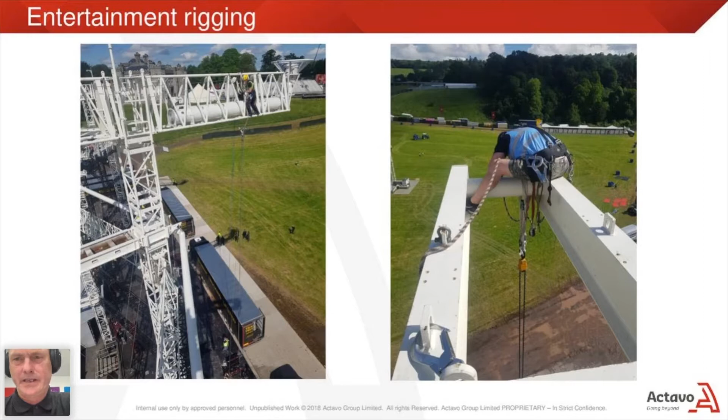Okay, so let's go through some of these slides. As I say, the slides are really just eye candy and don't necessarily correspond to what I'm talking about, so because it's quite technical, there's some slides of guys at work.

So I was talking about the difference between film work, film rigging, and event rigging. In film rigging, a lot of the work is in compression, so you're building scaffolding, tube and fitting scaffolding, building platforms for lights and cameras, support for sets and specialized rigs. You're also doing quite a lot of work in tension, so you're lifting and supporting loads. There's hanging structures and wire work for counterweight rigs, whereas in entertainment rigging, it's all in tension. So there is a bit of crossover, because riggers quite often work on projects building ground support structures, for example outdoor stages and ground support trusses, etc, generally with a purpose to hanging stuff out of them or supporting something.

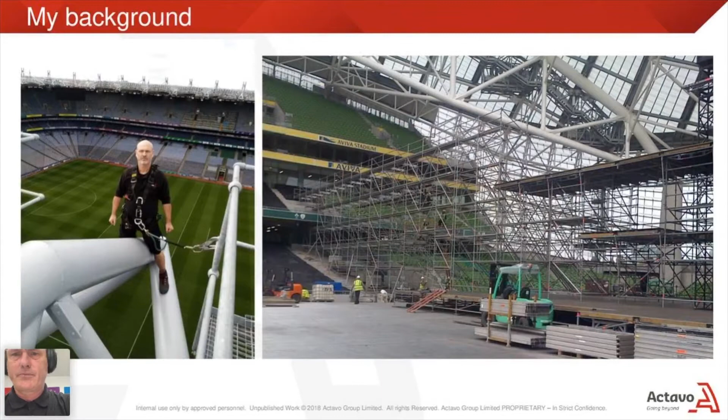So I would like to use an analogy. That's a picture of me on the left. It's a bit of a simple analogy really, but anyway, rigging is like driving a car.

You need to understand the task and where you're going. You need to choose the vehicle that's appropriate for the task. You have to have the safety measures in place to protect the driver - seat belts, airbags, etc. You need to have the right requirements to make the vehicle go - fuel, water, etc. You need to provide any special equipment that you need, like child seats or accessibility vehicles. You need to ensure that the vehicle is roadworthy and you're competent to drive it. You need to arrange permissions, insurance, permission from the owner, tax, obey the rules of the road, avoid shortcuts and congestion, and you need to respect other road users, provide proof of compliance at checkpoints, and finish the journey - park up, hand over your charge, and go home safely.

So safety is first and foremost in everything we do. Under EU directives, we have our primary legislation, the Health and Safety at Work Act, which details employers', employees', manufacturers', suppliers' and installers' responsibilities. There's also a raft of regulations that affect the work that we do. We've got our manual handling regs, working at height regs, management of health and safety at work regs. We also have lifting operations and the provision and use of work equipment regs, plus there's the CDM regs, which is the Construction Design Management regulations. And there are also industry-specific regulations that we need to follow as well.

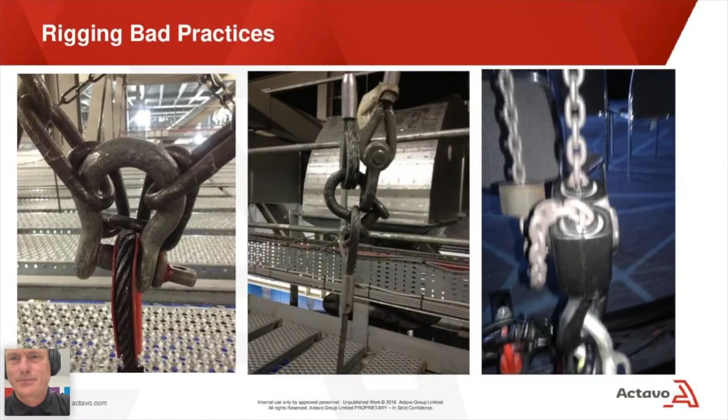I forgot to press on the slides, folks. So here we go, bad practices. Sorry about this. Now, here we go.

NRC is the National Rigging Certificate. It's really the only game in town for entertainment rigging. It's not a training scheme, it's an assessment scheme. They assess the skills that you should have and the knowledge that you need to have to work as a rigger in the entertainment industry. It's very useful. It gives you the confidence that you know what you're doing, have the right knowledge. It also gives employers and insurance etc. the confidence that you also know what you're doing.

So we're going to look at the riggers' roles and responsibilities. A rigging team consists of a head rigger, grounders, and top riggers. So ground riggers and top riggers. Generally they're broken down into teams of 3, so you'll have a ground rigger and two top riggers or up riggers.

Following the RAMs and toolbox talks, and signing, reading, and understanding your risk assessment and method statement, the first task is to measure out. This is called walk and chalk, and it's where we, using the rigging plot, mark out the positions on the floor of the plot with chalk using symbols and identification marks. The head rigger will then check these positions to make sure that they're achievable in the roof and negotiate with the production if any of them need to move.

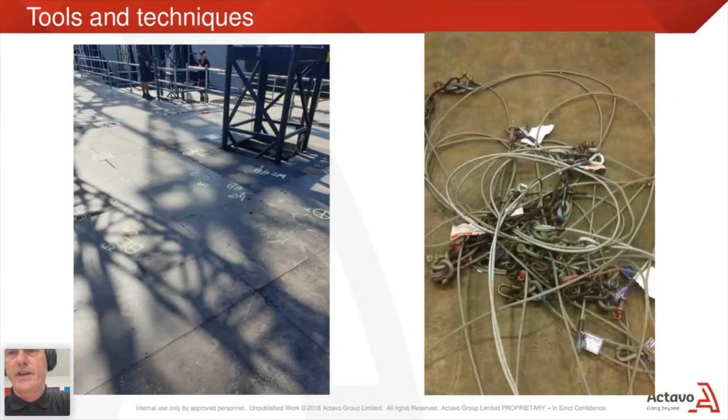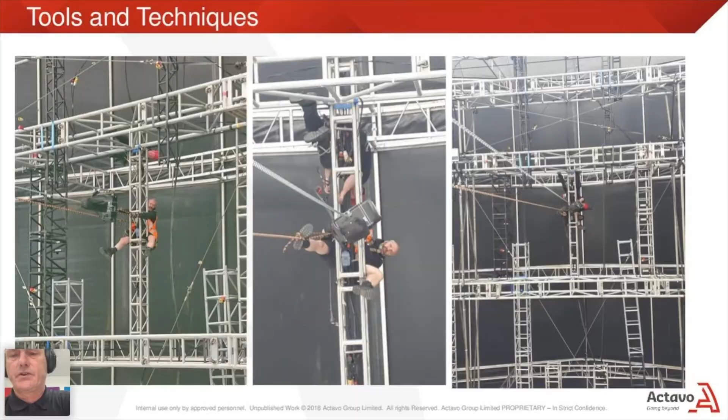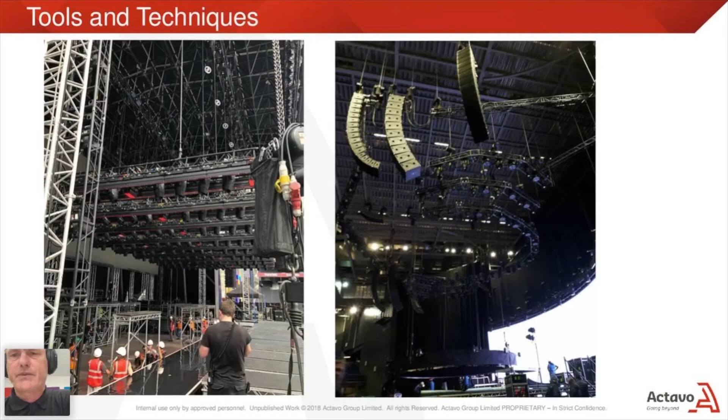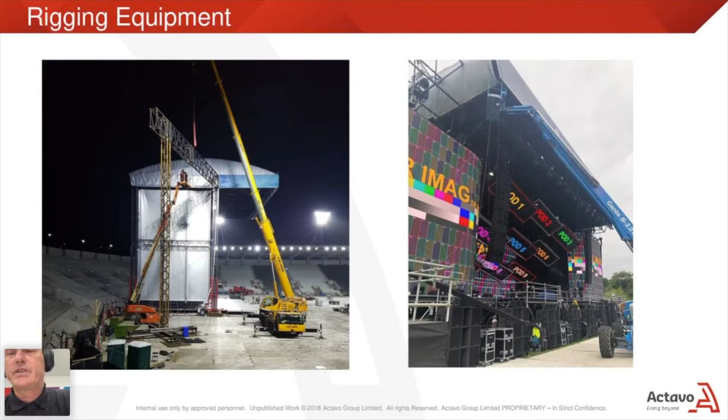So before we go on site, we need to ensure that calculations have been carried out to determine loads and forces. This includes in the support structure and in the load. We need to establish the safe working load of points and the forces at play throughout the load path. We also need to make sure that we have a plan produced detailing how the rigging system will work.

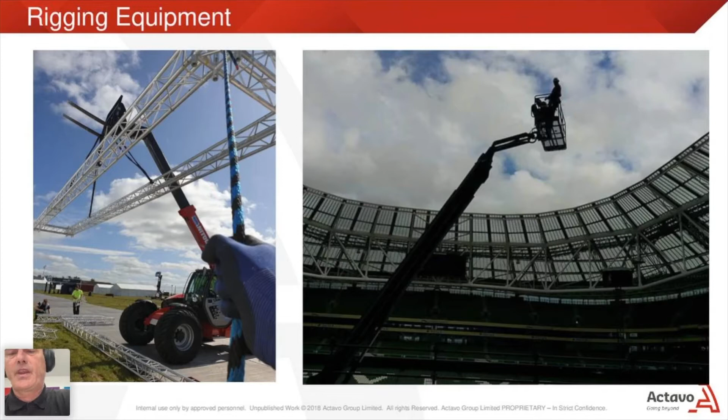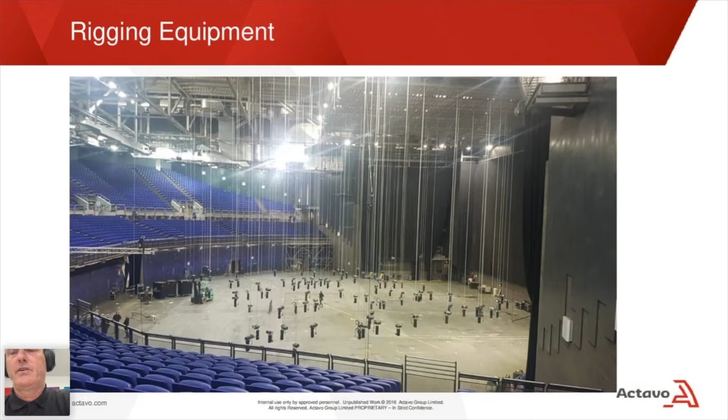This includes a rigging plot, details of the weight loads, equipment lists, schedules, and crew requirements. We need to make sure that all rigging points have been approved, and we need to get permissions to apply the proposed loads.

When we get on site, we mark out using scaled drawings and using a datum. The datum needs to be established on site, and it's used as a setting out point in the venue where positions on the plan can be measured off from.

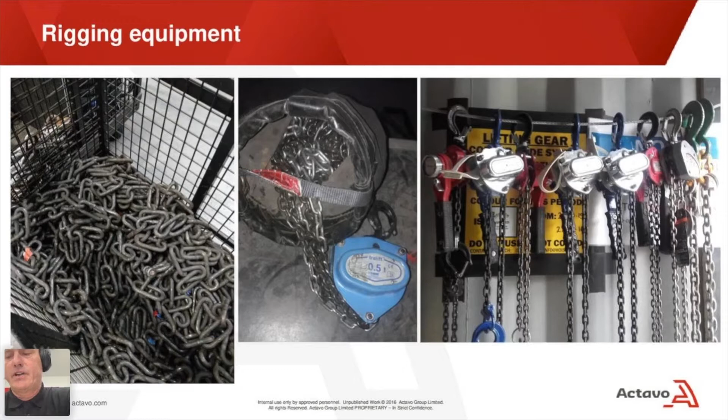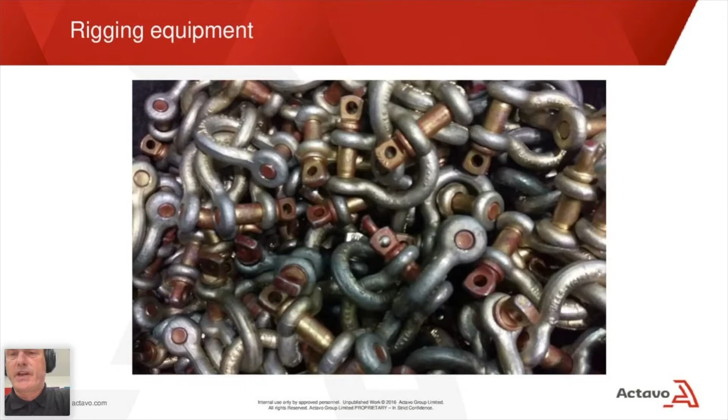It's important to take time and use precision at this point, because any changes that need to happen further down the road can be costly and can lead to dangerous situations.

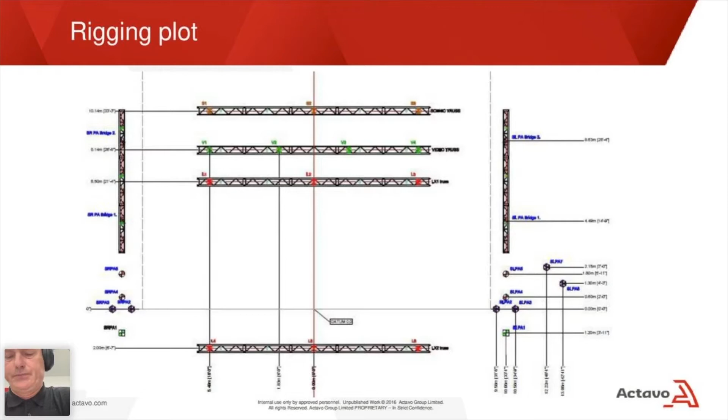Then we need to select our equipment. We need to make sure that the equipment is strong enough, that it's suitable and appropriate for the proposed task, and that it's compatible in terms of fit, size, and safe working load. So some components, for example, the larger shackle pins won't fit into the crown of a stacked chain, and it will side load the links of the chain, which is bad practice.

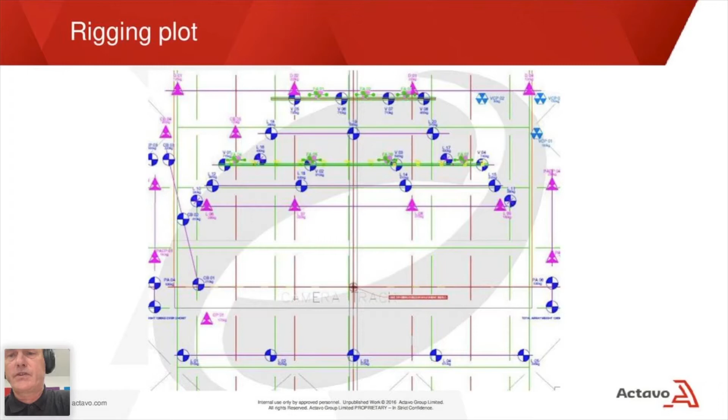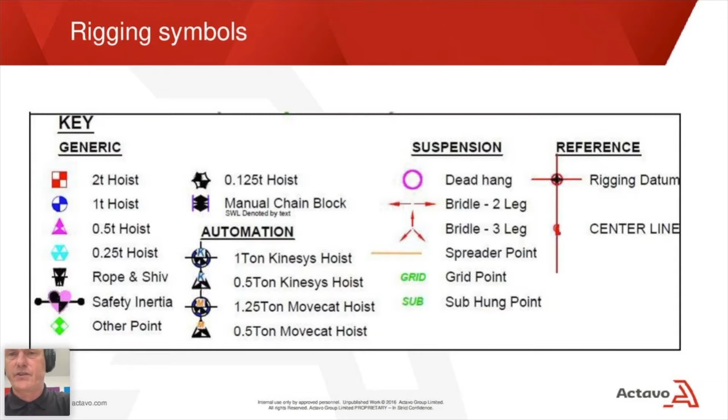So also in terms of size, if you use a 1-ton shackle for a 1-ton sling, the sling will not physically fit into the 1-ton shackle because a 1-ton shackle is actually quite small. 2-ton hoists have quite large hooks, so you need to use an extra large shackle. And then obviously you need to make sure that your safe working load is consistent right through the load path.

So hoists, here we go, hoists. There's many types of hoists. In entertainment, we use chain hoists. They come in different categories. We've got D8 hoists, which is a single braked industrial hoist. We have D8 plus hoists, which are double braked, have the added safety feature. And then there's also intelligent hoists, which have load monitoring capacity.

The capacities of hoists that we use are between 250 kilos and 2 tons.

Hoists can be either single fall, where a single chain comes out of the hoist body with a hook on the end, or they can be double fall, where the chain comes out, goes through a pulley at the hook, and then back up to the hoist body. It's important when you're using double fall hoists that you don't rotate the hook through the chain and introduce twists into the chain. This can damage the load chain, and load chains are very expensive. Plus, it's also not safe.

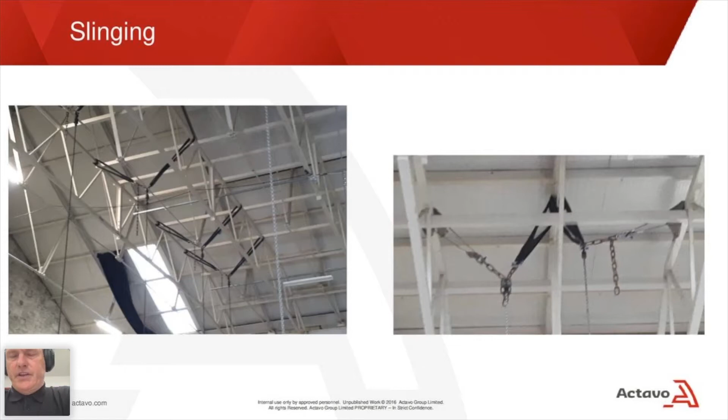In entertainment rigging, we usually go with motor down, which means that the motor remains in the box and we send up the chain with the hook to the roof and make the connections. There are two main reasons for that. One is the manual handling. Hoist bodies are heavy, so the ideal thing is that it gets taken off the truck in a flight case on wheels, down a ramp, across the floor to where it's needed. The lid is opened and you just send up the hook, and then the hoist body itself climbs the chain, and it reduces the amount of manual handling in that operation.

The other reason is for cabling. To enable a speedy install and de-rig, cabling needs to be done from the ground. The cables are then led along truss lines and then dropped off where the power and control is.

So hoists are marked up with a height of lift, which means this is the operating height that the hoist operates in. So if you've got a 20-meter roof, you need a 20-meter height of lift hoist.

Just a thing about trim height. Trim height is the height that we need to achieve for the design requirements of the show. When we're slinging the chain hooks, we need to make sure that it's at the right height so that the hoist can get to the trim height.

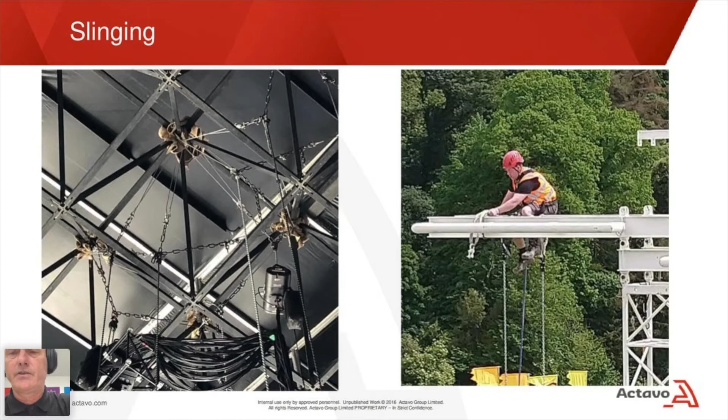We need to observe the sling angles and mode factors so that we don't reduce the capacity of the sling. When we're slinging loads, we need to make sure that the load doesn't rotate. And we have to protect the load from the sling, and we also need to protect the sling from the load. Especially sharp edges, like on I-beams, we need to use softening, burlap. It increases the radius of the angle.

Secondary suspensions are recommended for use with all suspended loads, unless you have other safety features. Most venues and licensing authorities have a policy on the use of safeties or secondary suspensions. If there's no policy, then decisions have to be made by a competent person.

Secondary suspensions are subject to risk assessment, correct installation, and you need to minimize the fall to less than 150 millimeters. In the event of a fall, the load must not be allowed to capsize, rotate, or swing when it comes under the load of the secondary suspension.

Each venue is different. They often have their own rules and codes of practice. These need to be known and incorporated into any planned use.

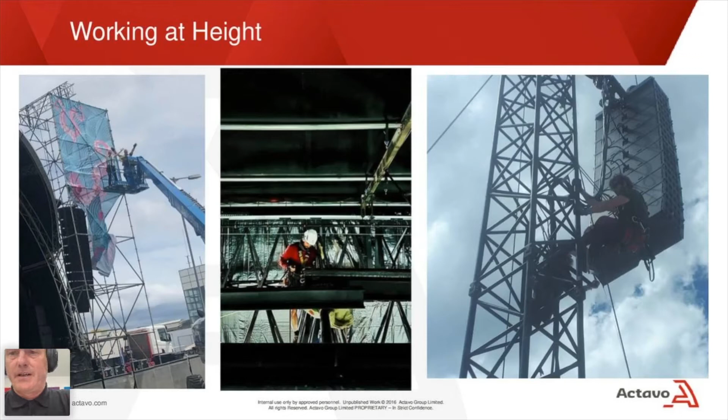So we have to get equipment up to height. Getting equipment up to height needs to be risk assessed. We can use goods lifts or catwalks, stairs, MEWPs, which are mobile elevated work platforms. We can use hoists or winches, or the good old-fashioned rope or hauling line.

And getting work down from height also needs to be assessed. You should never drop equipment or throw it from height, and you always need to control the descent of equipment.

Another key skill for riggers is problem solving, because changes happen all the time on jobs. Before you rush into changes, you need to assess the situation and the requirements. Rushing into changes will lead to dangerous situations. You need to notify a supervisor, and in some cases you need to refer to a competent person like an engineer or a venue agent to make sure that the changes you are planning are achievable.

The next step in the process is de-rigging. So de-rigging presents different risks than the installation. Generally, you have less time, crews are tired, you've got other crews working around in the same area. There's tight deadlines to reach, like if touring trucks have to reach ferries. Light levels can be low, and generally there's a lot of equipment moving around, and there's trucks coming and going as well.

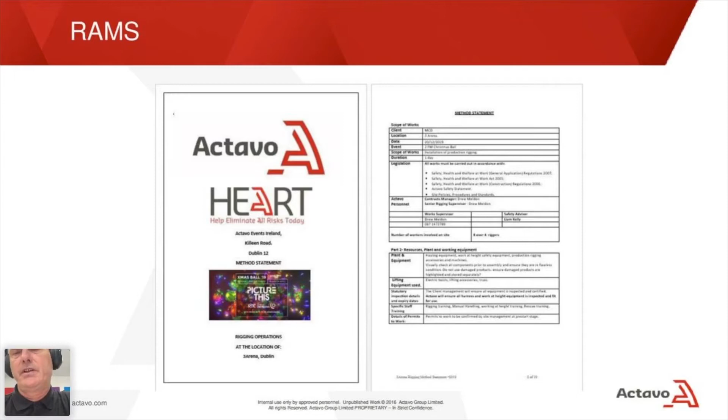All working at height needs to be subject to a risk assessment and method statement. Doing this properly should inform you of the most suitable means of access.

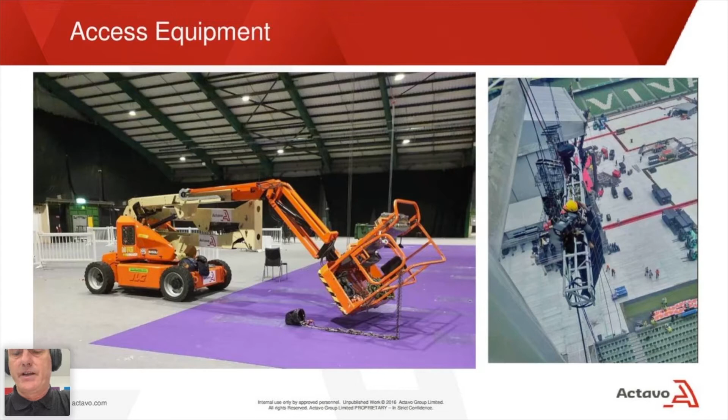There's specific hazards that are associated with working at height. They include falls from height, falling objects, failure or collapse of access equipment, fragile surfaces, misuse of PPE, using incorrect equipment, having untrained staff using equipment, overloading access equipment, difficult rescue procedures, exhaust from plant or equipment, overloading floors, and overturning equipment or plant.

And there are at-risk groups as well. Most at-risk groups include the young and the inexperienced, and people with conditions or disabilities are at more risk than others.

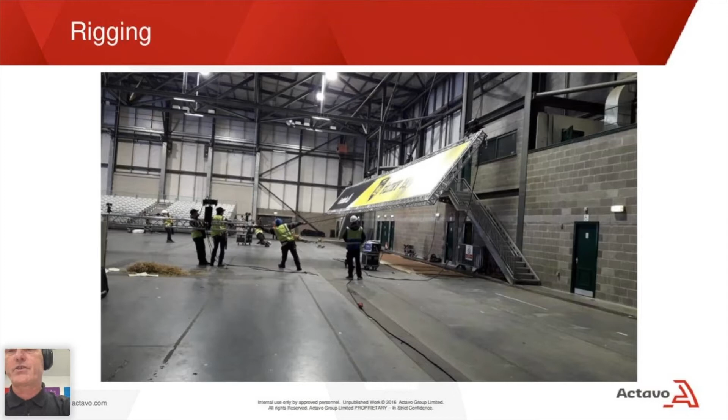So before the use of any access equipment, we need to look at doing a site assessment. We need to look at the location and the accessibility, the ground conditions and loadings, the height and reach that you're required to get to, obstacles and obstructions, overhead hazards, access restrictions, weather, and the operating envelope of available equipment.

Which means that if someone says to you, oh, that's grand, we have a machine here that will do the job, and when you get on site, you find that it actually won't reach where you need to go, so you need to check that out as well.

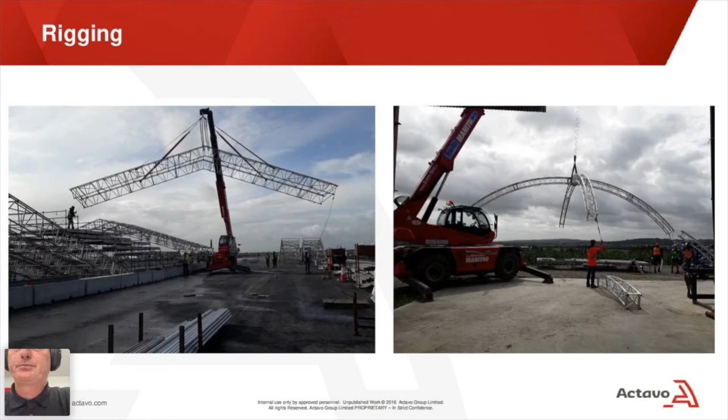Another thing about working at height is rescue procedures. So rescue procedures are required for all work at height. This includes a rescue plan, a rescue crew, and rescue kit.

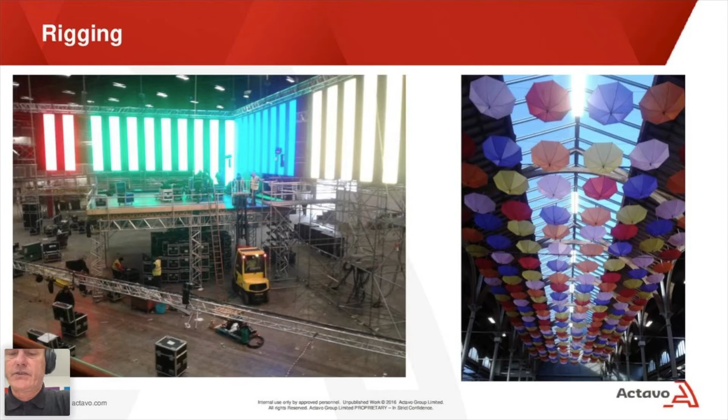So we're going to look at access equipment now. We have our fixed ladders and catwalks. We have fixed platforms, for example, grids above theatres or in arenas. We use MEWPs. We can use access towers or scaffolding, ladders, tallescopes, rope ladders, and rope access. All require training. All require inspection regimes and record keeping.

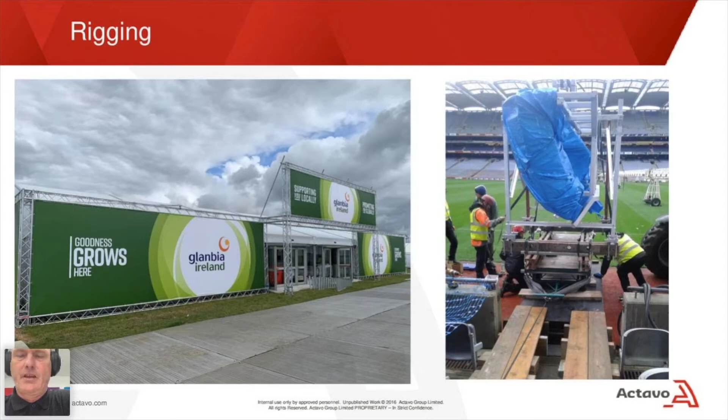Suppliers' information should be available for all of them. They should be risk assessed, only operated by trained and competent people, and used in line with guidance and best practice.

So PPE is needed for all work at height. This is your personal fall protection equipment. These systems include fall arrest, work restraint, work positioning, rope access, and rescue systems.

The equipment that's required for these is your harnesses, and you need to have the correct type of harness. A fall arrest harness is not suitable for rigging. A fall arrest harness is a secondary backup device which should stop your fall in the event that your work platform and your handrail is not effective. Whereas in rigging, your harness is quite often your primary source of protection. So you need to get the right type of harness and the right type of lanyards and connections for the use of this.

In the event of a fall in a harness, there's a thing called suspension trauma, and depending on the type of harness, the quicker this will set in. So a rescue from a fall at height is very important and needs to be timely. It needs to be understood by all the crew and it needs to be properly risk assessed.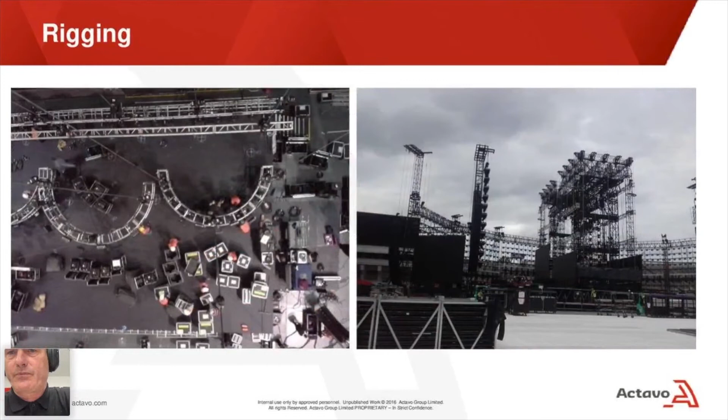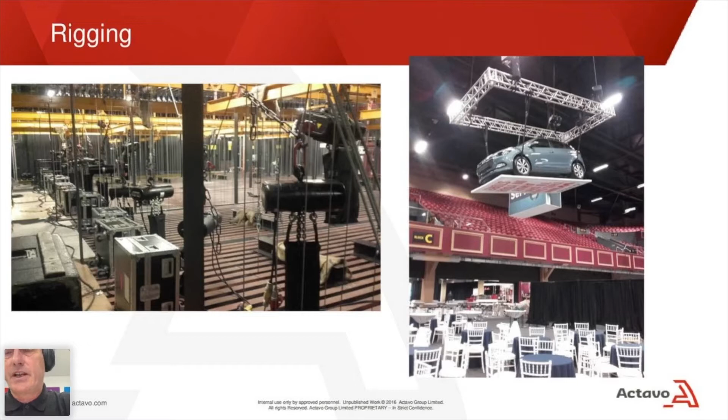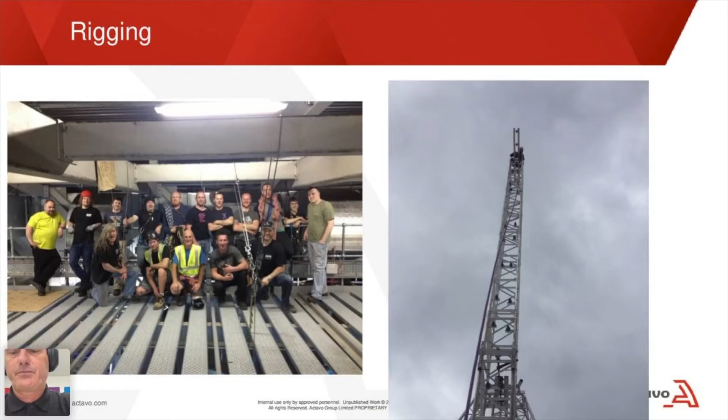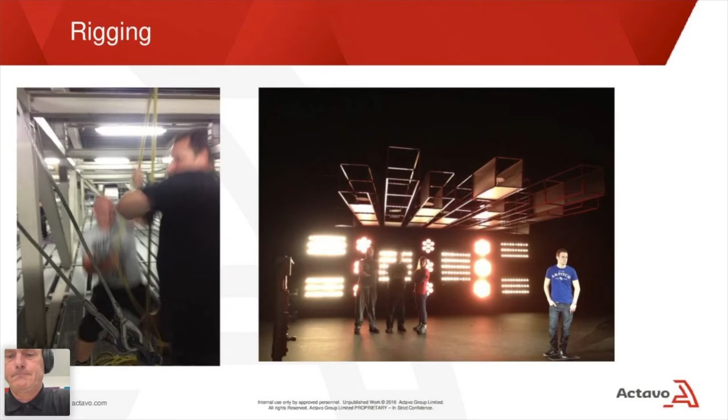My first tip is know your job. Know the do's and don'ts. Understand the regulations. Know the tools and techniques, and know your equipment, its uses and its limitations. Understand plant operations and what capacity certain plant has. Gain as much site knowledge as you can for the different places that we work. Identify hazards and risks as you go along. Learn best practice and use best practice. Try and acquire as much industry knowledge as you can. And always admit to your lack of knowledge or understanding, because that's how you learn something, and it will stop unsafe situations happening for yourself and for the team. Also admit to your mistakes as you learn.

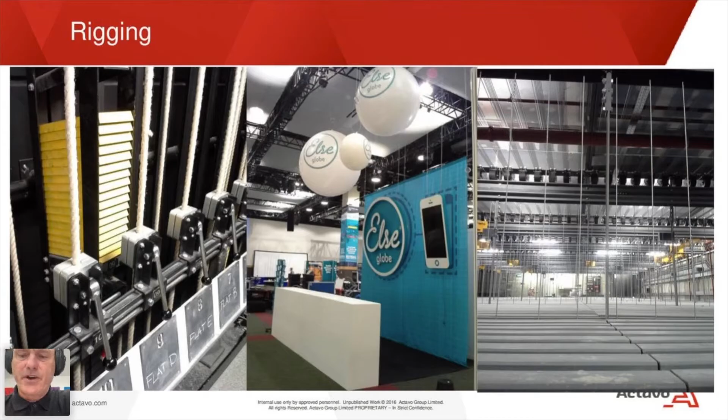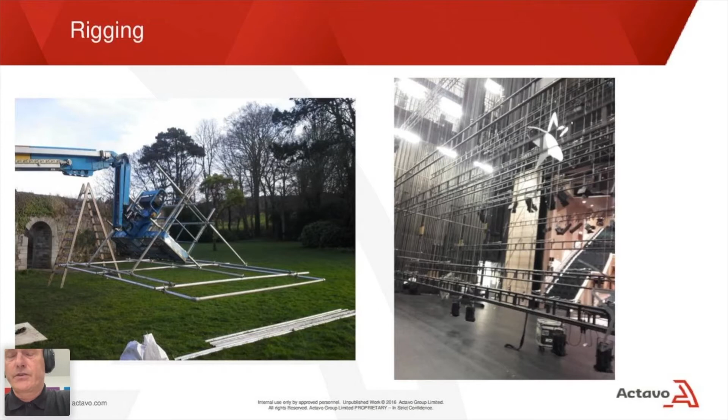The second tip is work safely. Respect your equipment - your equipment will save your life. Inspect it, log the inspections, store it properly, and upgrade it when it needs upgrading. Respect yourself, keep fit, recognize your abilities, and get enough sleep. Respect other people and look out for them. Read your RAMs, understand them, and sign up to them. Ask any questions you need to clarify any issues. Then you need to comply with company regulations or requirements, and also comply with venue or site requirements.

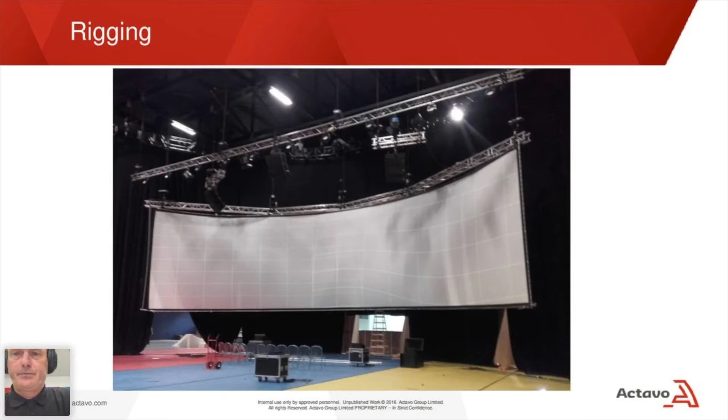The next one is turn up on time. You're part of a team, and if you're late, the team will not function properly, and the whole project will not progress as designed. If you're asked to be on stage for 8 o'clock, it doesn't mean pulling into the car park at 8, or being 5 minutes away in traffic at 8. In fact, it's always better to be there earlier than the allotted time, because that's when you get to understand the project and the plan. If you arrive late, you're already stressed, you miss the project being explained to you, and your supervisor and workmates are stressed too. So arrive on time, turn up for work with the correct equipment. There's no point having the harness in your car when you're required to work up on the roof in the 3 Arena. So turn up with your harness, with the right equipment and all your tools.

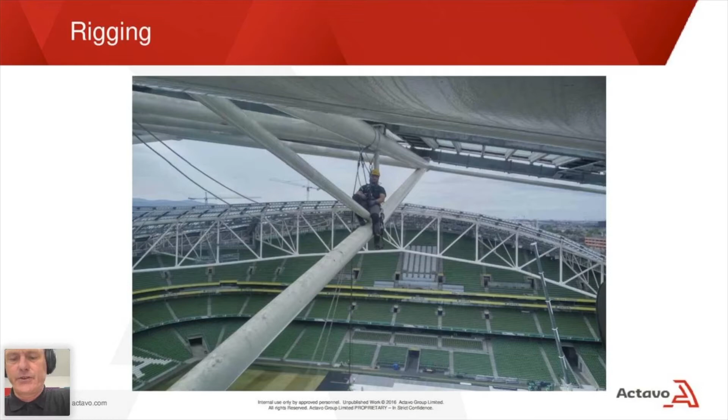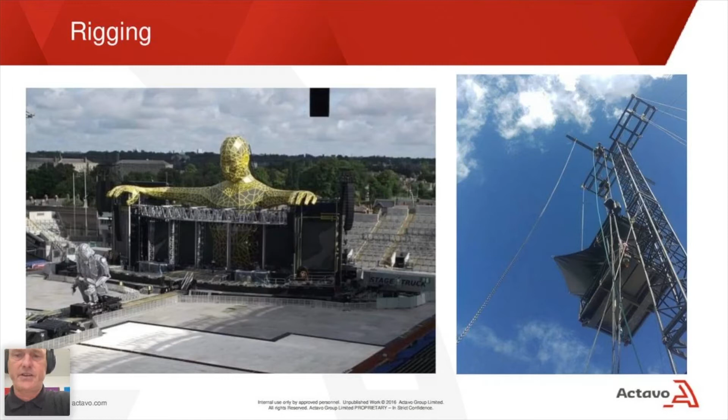Be customer facing - you need to be amenable to the client, polite to the client, and presentable. Be dependable and consistent, because this will get you more work 100%. If you're not dependable and not consistent, the person that is will get the phone call first. Work is for work, not talking, smoking, and drinking tea. If you do a lot of that and aren't attending to your work, you will get less work. Break time is allotted for a reason, so observe the times for break time. If you're not present, then as part of a team, the team won't operate properly.

My fourth tip is attend to your work - watch and learn, pick up the tips, follow best practice. Never leave other people in the proverbial. Complete your work.

Your work includes counting and loading trucks. Monitor lifting operations, so if you're operating controllers, watch what the load is doing. If you can't see it, get a spotter. But always monitor any lifting operations.

If you're given charge of an MEWP or other piece of kit, ensure that you park it correctly in a safe way, that you charge it, that it's on charge. And for supervisors, you need to supervise effectively.

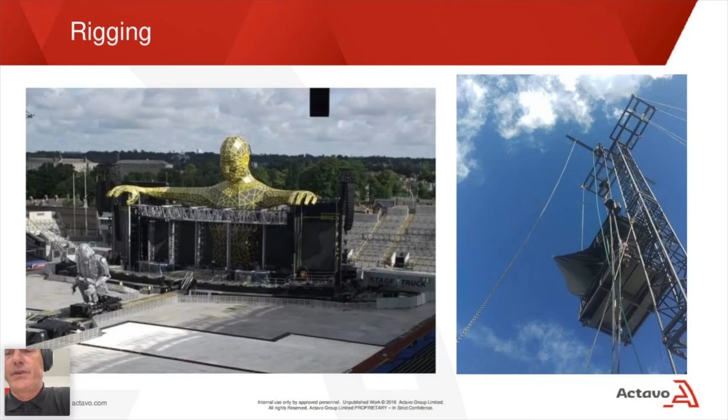The fifth tip is follow the task. First of all, you need task clarity. The task needs to be allocated, delegated and explained. So communication is very important.

Do not deviate from the task. If you deviate from the task and change the design, under CDM regulations, construction design and management regulations, you become the designer. The liability ends with you. So do not deviate from the task or the design. If you do need to deviate, you need to get clearance.

The task needs to be managed properly, so you need to make sure you have the right materials and tools to complete your task. This also includes wrapping up gear properly and counting and loading. The gear is designed to be used again and again for different productions, so it needs to be in the state it was found in when you originally started using it, so it can be used again easily without someone going back over and clearing up and cleaning up.

So the sixth tip is help other people. Pass on your knowledge, assist trainees, show them how to do jobs. Assist clients to the best of your ability. Be part of the team.

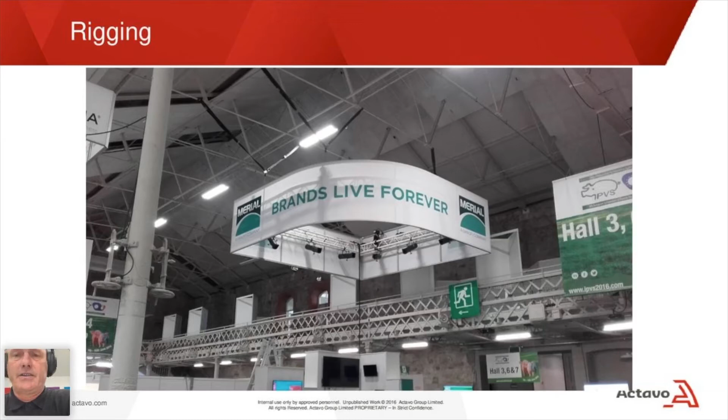So I'm going to just shoot through all of these slides, which I was supposed to be progressing through here. Sorry about this, my slide management has been absolutely abysmal.

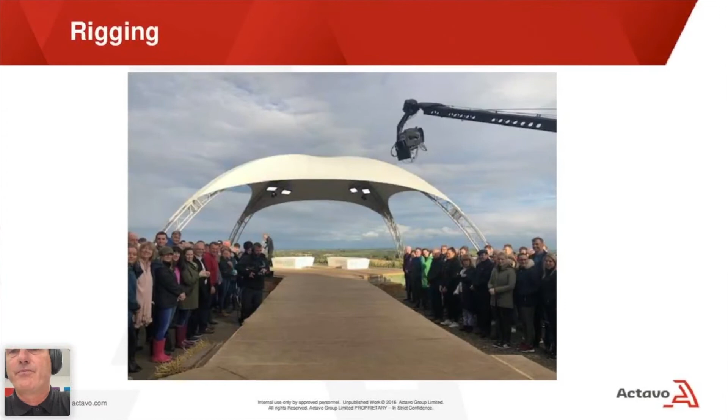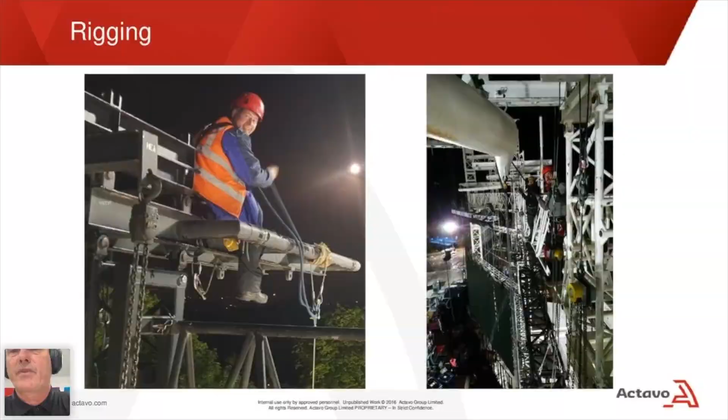These are photographs taken by riggers on rigging jobs, and some give good insight into the situations we find ourselves in, and the sorts of projects we engage in. I'll go through them, let you have a quick look before we get to our final slide, which is go home safe. Thank you very much. That's the end of my presentation, Mark.

Super, thank you very much. That's a whistle-stop tour of all the bits and bobs involved.

One of the things I've always thought, working on gigs and events, especially complicated shows with lots of rigging, is the riggers, more so than a lot of other functions, have the capacity, if they're not on top of their game, to at the very least cause issues and problems, but actually cause, from my perspective, risks to others and danger on site as well. So I think a lot of your points are very well made, that the importance of what riggers do on shows, from a safety perspective, just from the point of view of the impact they can have on other people, is significant.

And I always thought that the risk of stuff dropping from riggers to the ground, whether that's a tool or a phone out of a pocket or anything, must be one of the highest risk elements of what you guys do, aside from the function you're performing, literally just being that high above others potentially working on the stage, and stuff falling. Is that as big a risk as my safety brain tells me it is, or are there simple systems and procedures you use to not have loose things like that could fall?

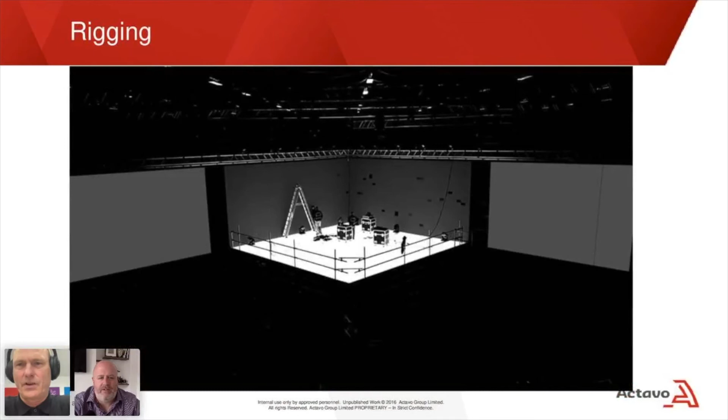You shout now if any of the... What is going on there? Okay, this one here. That's real, is it? That's real life, or that's a... Yeah, that's real life. That's a job I did for Maxim for Milwaukee Tools in City West.

And that's an LED floor. And also there's LED screens to the right and left as well, and all the way to the corner there. So the whole thing is an LED wall. Is that suspended? Is that hanging?

Oh, the LEDs are. The stage is actually supported on a truss structure that we built. Ah, okay, it is high though. So it's at a height. It is high, yes. The picture was just throwing me. Yeah, okay, very good. It's designed for whoever's on the stage to be at the same height as the people on the balcony.

Ah, oh God, sorry, thinking of City West as a venue, that's reasonably high. It is, yeah. So what you're standing, the camera there is from the point of view of being on the balcony in the center of the room, looking down towards the loading doors. And what kind of activity was on that stage then?

Was there like kind of... Okay, so once it was installed, we took away the handrail and installed a thin wire handrail, and a presenter was up on the stage giving a presentation to people on the balcony. Ah, okay, very good. Oh, specifically oriented to the balcony. Yes, exactly. Yes, very good.

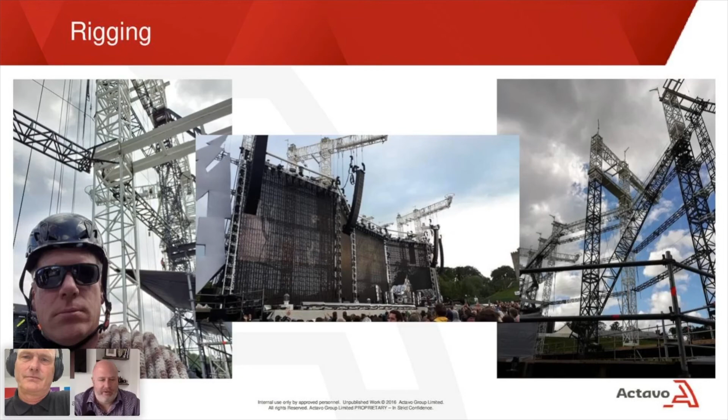I think it's fascinating, again for people who don't do this stuff, to look at something like that and hear you talk about how that is designed for quick install. And again, they do need to be, because the longer these things take, the more dangerous they are in theory, and the more they're costing someone money. So the systems are designed as well as they can be to...

Ah yes, so they're actually doing something at that height, are they? And this is what they'd be physically standing on, or that's keeping them safe up there. Yeah, okay, that's right. Well, that must have been an interesting one, because that's not a standard.

Well, sorry, to my mind, looking at it, I doubt that stadium was designed with this type of thing in mind. Oh, absolutely not, no. This is a situation where we needed to go to Michael, the engineer for Croke Park. Yeah.

Give him our design and our proposal and the weight loadings, the imposed weight loadings. And he then had to turn around and say, yeah, I'm good with that. And then we were able to install. So again, you could design the most amazing thing in the world, but ultimately someone has to decide that where you want to put it, it will be safe and can take that kind of a load.

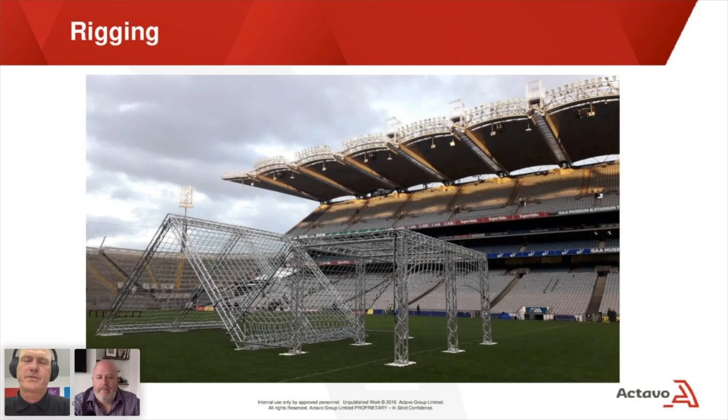100%. Yeah, and I mean, the top of the biggest capacity outdoor stadium in the country is an interesting place to be trying to build things. If you spot something here you want to talk about, by the way, please do. I'm just trying to go back again.

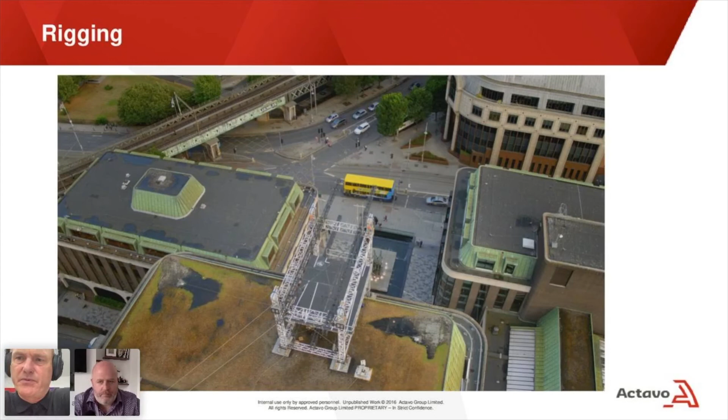Interesting ones - this is Ireland's Fittest Families again. Okay, if you go to the slide just before, just after this one? Yeah, that one there. So that's a rig for contestants to walk out on. The blue ropes you see hanging at the end, they had to pull up the ropes, get the flags, and then go back. They had to do it in relays - there was 4 team members running out in relays, and believe me, they ran out.

Above we have the cantilever truss sections as well, which were carrying tracks, and that track system was the safety system for the contestants that they got clipped into before they went out on the beams.

And what building is that? That one is the Irish Life building in Dublin. So if you look at the front 2 legs, they come down, and if you see at the bottom of those or around the corner, you'll see what looks like rails - those are the old rails for the window cleaning cranes, permanently there. That level there is the slab level of the building, the concrete slab. The legs going down onto those 2 rails, no problems with weights there.

No problems with weights there. The back legs, on the other hand, are sitting on an asphalt roof with an allowable loading of 75 kilos per meter. We had close to... Doesn't strike me like a lot. 2 ton. Wow. Yeah, we had close to about 2 ton on each of the 4 legs.

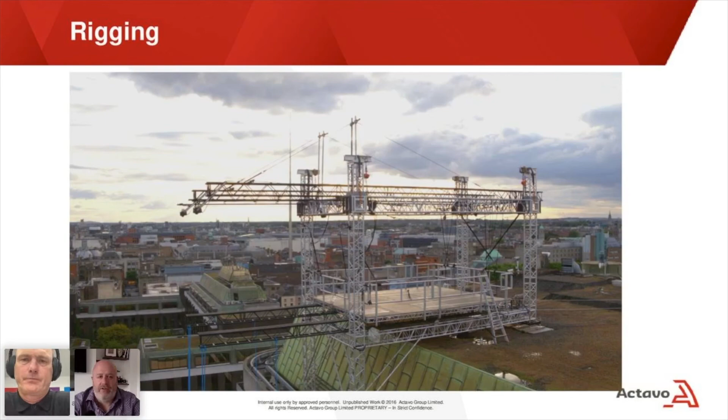That seems like an awful lot of work for one activity in that show, when I feel like someone should have had a backup plan and gone, no, this is getting far too complicated, let's do this other simpler thing instead. But they were obviously determined to make this one happen. Correct, yeah. I'd say it looks spectacular too. I'd say I'm going to press this button again. You shout at another one.

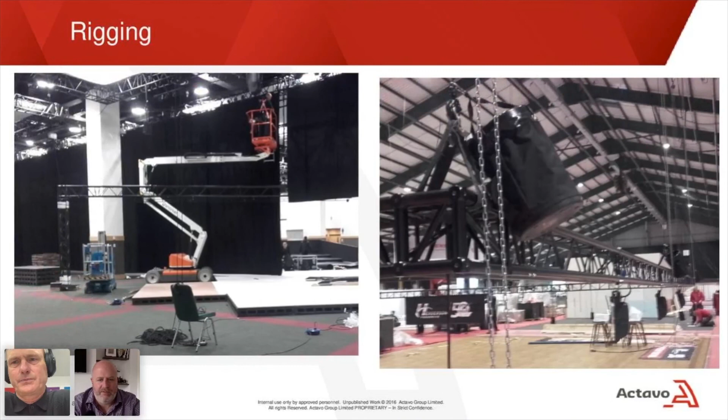I'd say we have time to maybe talk through one more interesting job before we let people go, because there were some fascinating photos. That one there is again City West, that's a Facebook conference we did for the last two years. That is a massive screen in the middle. Yeah, all three of them are LED screens.

That screen in the middle, we had to put a load of spreaders in the roof to spread the load between other beams in the roof. It was difficult to get any information from the engineer involved with that project, not the client engineers, but the venue engineers. It was very difficult to get any sort of confirmation. So that was a massive, big, heavy screen.

So in a situation like that, when you're not getting that information from the original source, which is where you'd actually like it, you guys do have ways then of going, right, that's not forthcoming, we still need to make this work. So we're going to have to figure this one out ourselves and spread that load to be safe. Yes, okay. Yeah, absolutely.

Yeah, cool. I think, in hindsight, we could do a whole other session of just going through each of the photos and talking about the challenges, because it's one of those things. Paul and I were briefly talking about even just the event we had at the weekend, where there were just four very simple, in your world, scaff structures is all that went in there. And again, from our perspective, we end up looking at things and figuring out things and everything.